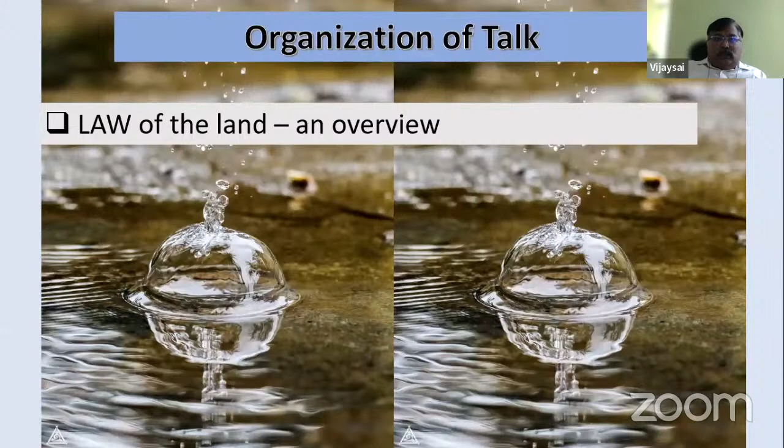So coming to the topic, the way I have organized this presentation, I call it the law of the land, just an overview. And why it is law, we will come to that very soon. Then we have a very interesting situation today, what we call the game of progress versus protect, with science being the driver there. So how do we look at that aspect when it comes to water as the domain, and water being part of the environment?

Technologies for water treatment and the role of chemical engineers, that will be the next topic. I would like to talk about a product that L&T Water has come out with, which is AGBR, and how one went about improving, developing, and then demonstrating application of this product, so that it benefits everyone here. Finally, we will conclude the talk, and this is the way it has been organized.

Interestingly, I call it the science of sacred 7. It's a coincidence that science is also a 7-letter word. However, the sacred part is something associated with our mythology. Way back, 5,000 years or even more, we knew that light is made of 7 colors. We call it Saptashwa or Ratha Saptami. And we talk about the 7 chakras or the 7 spiritual centers in the body, which are associated with the ductless glands. Likewise, we also talk about the 7 worlds or lokas associated with the 7 oceans.

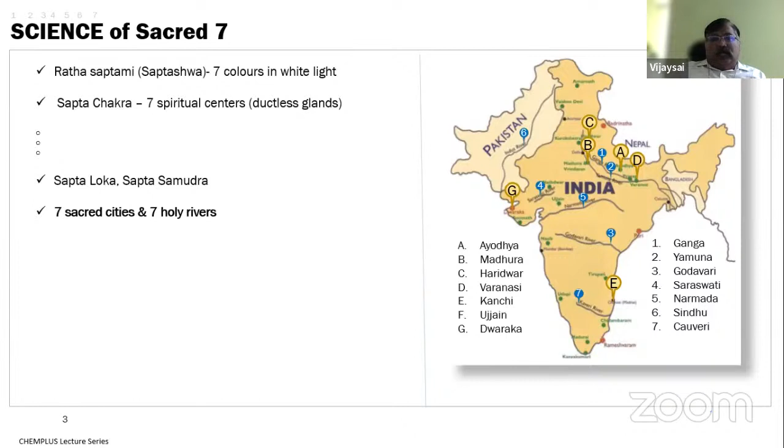Likewise, we have marked the 7 rivers too. So Ganga, Yamuna, Godavari, Saraswati, Narmada, Sindhu, Cauveri. These were the 7 holy rivers that we perceived in our literature way back 5,000 years and even a few thousand years too. So coming to that, what is the significance of that in today's context? How do we think we have transformed all this land, water, air in today's context?

In fact, the yogic literature as well talks about the 49 types of vayu or air in our body, which is also a derivative of 7. But in today's context, the 7 topmost polluted cities in the world are in India. And that is quite contradictory to the significance we had assigned to a few places in the past. 70% of our water bodies today have been declared polluted, and the 6 rivers are in a worrisome state now, and one of course is being reborn, which we call Saraswati.

Now, land degradation has become a major issue, and we should realize that 70% of the land is left now from being degraded, which we have to pay attention to now. So there are quite a lot of things happening to land, air, and water. And that is what I want to call the law of our country, which is quite significantly damaged. So when we say that these are all damaged, we try to look at the factor. Is it the population? Is it the education? Is it the poverty? What is it that has actually led to this degradation?

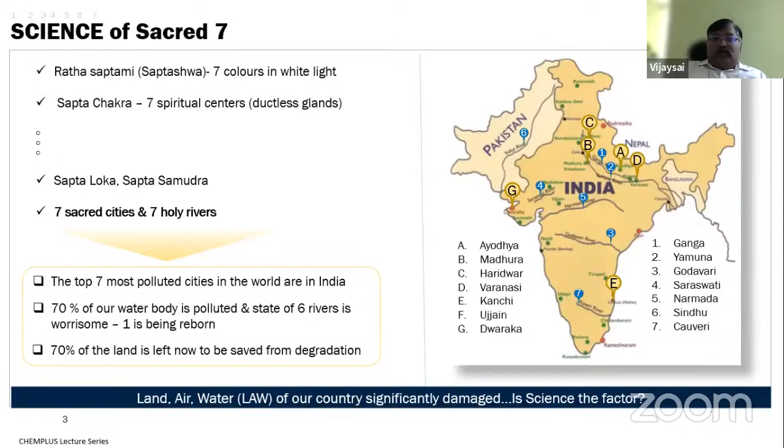And some people, in fact, ascribe it to science as well. So maybe science is one of the factors which has contributed to all these things. Is that the way to look into that? I mean, if science is responsible, let's look at what science has done to our life, and let's not belittle the importance of science in our life today. We have seen virtual presence, which has made distance almost meaningless today in terms of connectivity. We have amazing tall structures. They are tall to the extent that they are ladders to the cloud and even beyond, a structural engineering marvel never even dreamt of a century back.

Circumnavigating the Earth might today take a little longer than reaching the once mysterious Mars. And that's the space mission we have achieved. There is a situation today where, in fact, pets have started envying robots. Very soon, they will start getting confused: who is my owner? So robotics has been taken to a different level. Let's think about automation now, where the steering of the car is questioning the role of a driver. Sit tight and sit idle, let me do the job, is what the steering is telling the driver.

So life is filled with so much excitement. It's enjoyable, and it has made our whole Earth smaller than it used to be. So this is all due to the way engineers have crafted this, and there is a rich excitement in everyone's life today, and that's exactly what science and technology has brought to our life, thanks to the role of engineers here. And as we look into the near future, it's even more exciting.

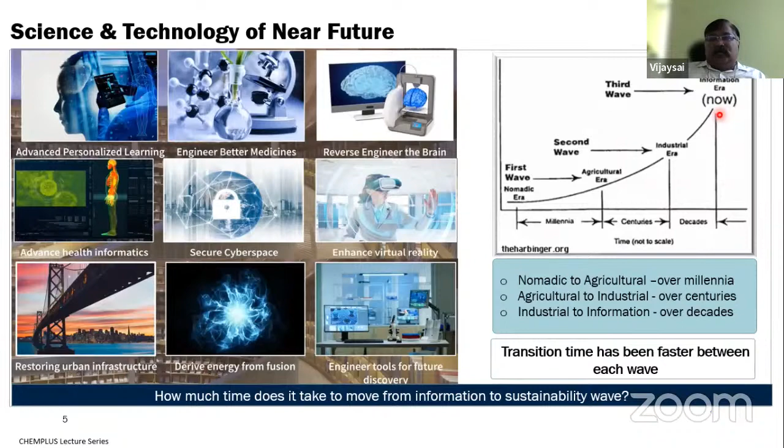So that's where things become in fact more concerning now, because when we look into the land, these are the quick statistics which we can immediately pull out from our internet. The solid waste is reaching an alarming level. The health hazard associated with solid waste is growing day by day. Leachate has become a problem, and every year we have been dumping enormous amounts of solid into the ocean.

When we talk about air, in fact, it is affecting our GDP in some sense, and our productivity is getting affected, and also the agricultural yield is going down. In terms of pollution impact, we are seeing that 7% of our healthcare funding is getting lost because of air pollution. And India, in fact, tops the list, where around 1.8 million people die every year because of air-related issues. Most importantly, in today's context, what we are seeing in water, the data is no different.

There are innumerable waterborne diseases that we are getting to see because of the polluted water bodies. As I said, 70% of our water bodies are polluted in the country, and 50% of the rivers are already polluted. So we now have to understand the context here. On one end, science and technology has helped us progress and make this world so beautiful. On the other hand, the same science and technology has led to all these miseries.

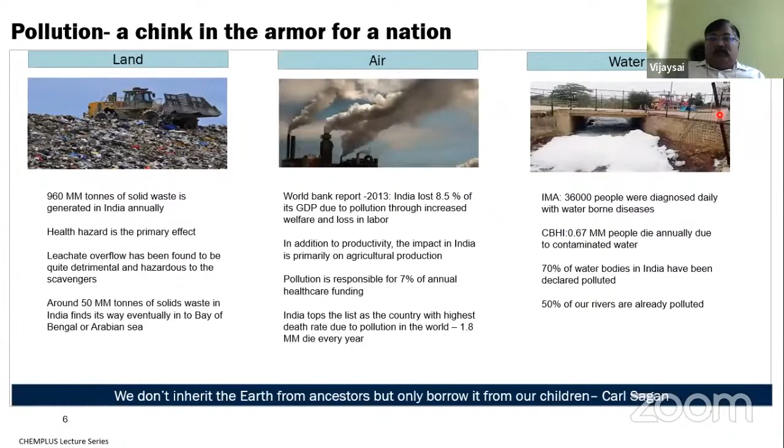Moving on to the particular topic of water now. Land, air, and other things we can talk about later, but the focus today is going to be water, and how we are going to manage all the challenges associated with water. So when we talk about that, it's important to understand what constitutes water, what do we mean by impurities, what is the cleaning associated with that, and particularly, what is the role of the chemical engineer?

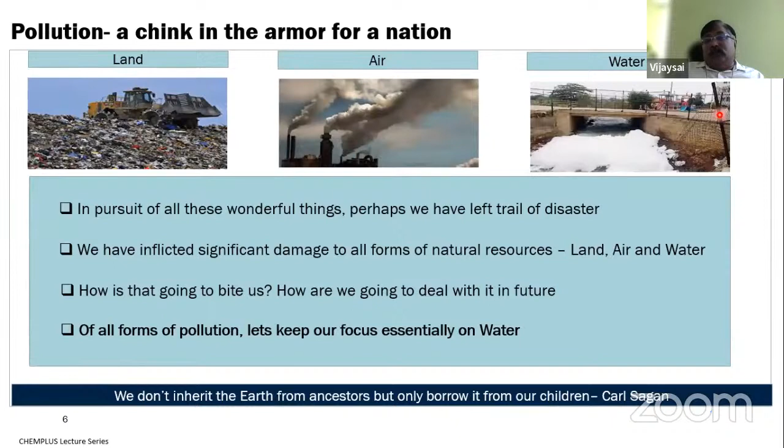So I would say that, in terms of water, these are the basic ingredients that you can consider to be the water. If we understand these three parameters, particularly the organics, solids, and nutrients in the water, and the interplay between them, I think we have understood water completely. But the fact is that the interplay is so complex and so tightly linked that sometimes it becomes almost impossible to decouple them and understand the water in totality.

However, when we talk about organics, it is parameters like COD, BOD, TOC, which are as fundamental as current and voltage for electrical engineers. Whenever you talk to people in the water domain, these are the parameters, the COD and BOD particularly, they talk about very often, and try to link with the quality of the water they are trying to treat. Likewise, when we talk about solids, we all know that TDS refers to the dissolved solids, suspended solids is TSS, and volatile suspended solids is another part of the solids.

And when it comes to nutrients, which also have to be removed from the water for it to be considered clean, we have total nitrogen, nitrates, and total phosphates, and these are the impurities here. Of course, there are physical properties like pH, temperature, turbidity, color, odor, and all these things are the physical properties.

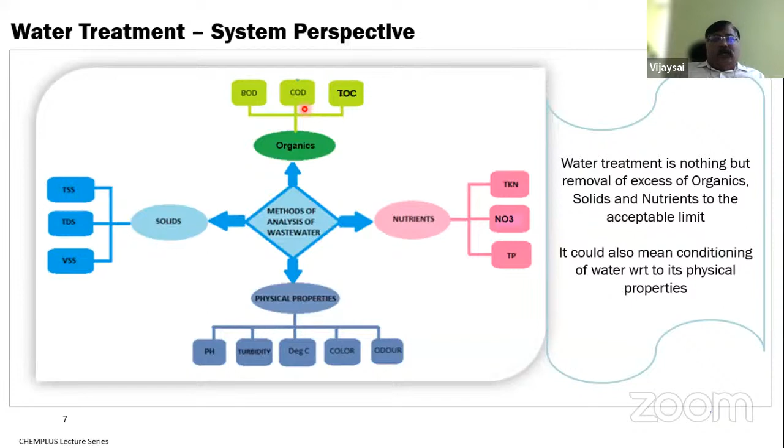So, when we think about treating water, the importance of all these parameters should be known, and then we can finally say how this water can be treated and what technology is to be used for treating this water. So typically, when we look into water as a business, we look into three segments in particular. We talk about drinking water, sewage water, and industrial discharge, what we call effluent treatment.

So sewage and effluent I broadly put under the wastewater category, and drinking water, of course, is something which comes from various sources, is subjected to some level of treatment, and is made available for users to drink. Of course, there are packaged drinking waters, there is natural mineral drinking water, and then the water we get from our tap, which is supplied by the municipalities or the corporation.

So today, all water is not considered to be safe, because even when you think about drinking water, there are so many impurities present at dissolved and suspended levels in water. It could be arsenic, it could be lead, it could be fluoride, it could even be uranium. Just Google uranium levels in Indian water. You can see almost the whole country is painted in red today.

And the World Health Organization recommends 30 ppb as the safe level of uranium in water. But in the majority of the states, out of the 1,477 samples that have been tested, the uranium level has gone way above the prescribed limits. That is due to various reasons, of course, which we can look at a later point.

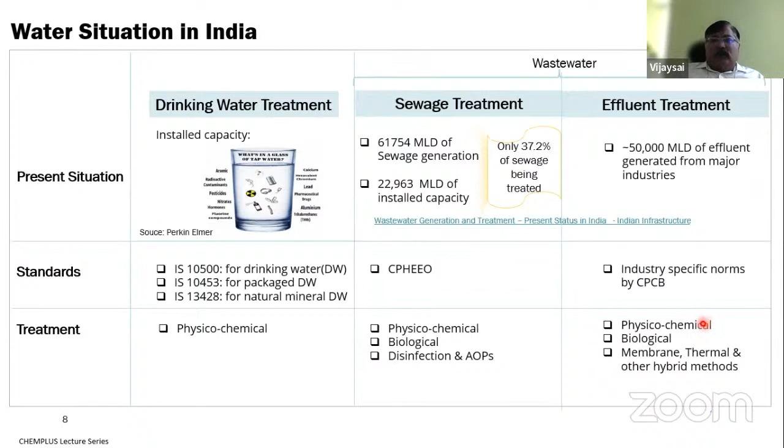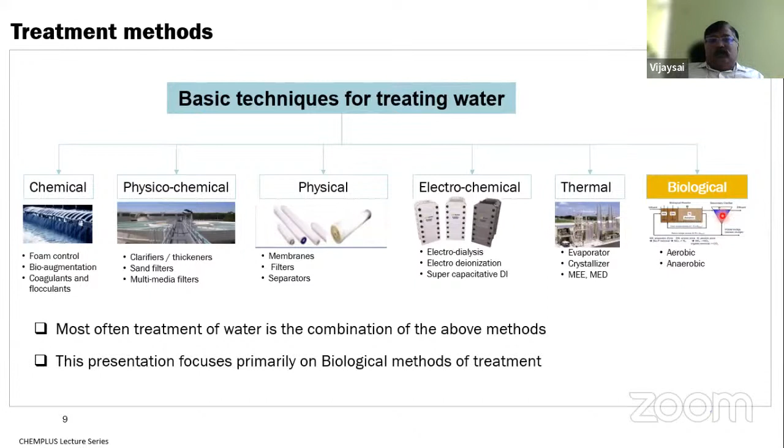which are electrochemical based. And likewise, thermal is a technique where we just boil the water, even under vacuum or atmospheric conditions, so that we get the cleaner water as vapor, and the muck gets left out. So that's the thermal solution. And today, that's why I have highlighted it in a different color, we are focusing more on the biological ways of treating water. Let's keep the focus today on biological treatment techniques and how they will help us, particularly to address the situation of municipal wastewater.

Before we get further into the topic, I just wanted to take a small pause and understand if there are any questions, or we can move forward.

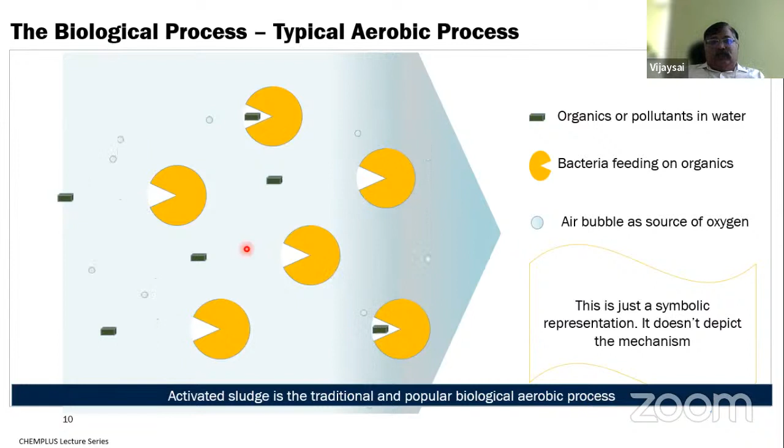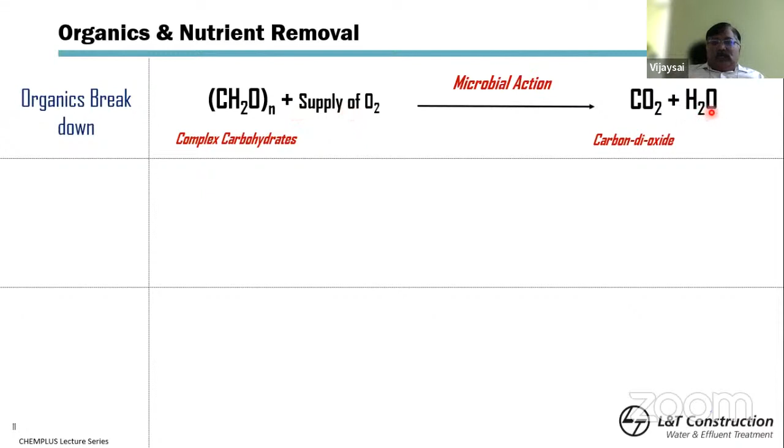So what are we trying to remove in terms of wastewater? We have the carbon as the main source of food for the bacteria. So we are supplying oxygen through the air. Basically, the carbon and oxygen react to form carbon dioxide and water in the presence of microbial action. So that's what we call treatment here.

Likewise, there are nutrients in water. The nutrient could be ammonia or phosphate, and the ammonia basically gets converted into nitrite, nitrate, and finally nitrogen. And that is also a biological process. In the presence of bacteria, this whole process takes place. So this is all very fundamental to the water treatment here.

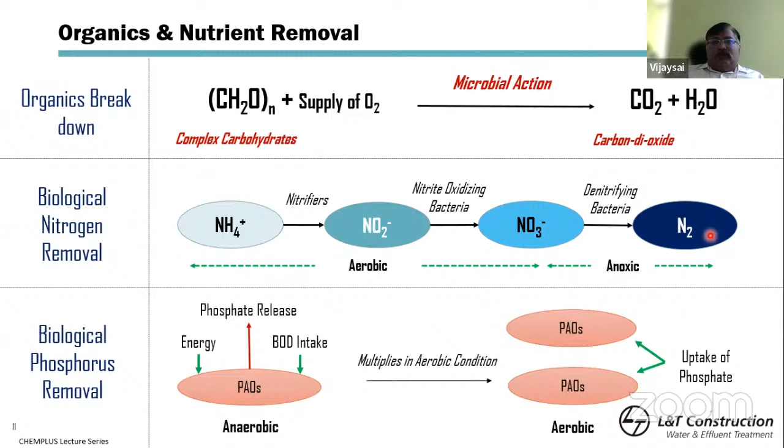We will be touching upon many terminologies here. For instance, there will be biological oxygen demand and chemical oxygen demand. So in a sense, we know that wastewater comprises organics, which we consider part of the waste. Now the organics are nothing but carbon compounds. Now the carbon has to be converted to CO2 in the presence of microorganisms.

So if we are talking about the amount of oxygen required to chemically convert this carbon source into CO2, that is, what is the mass of oxygen required per liter of this particular waste, we call it chemical oxygen demand. That is the COD, which is most fundamental. That is nothing but the mass of oxygen required to act on the organics in the water and then convert it into CO2.

Likewise, we talk about the biological oxygen demand. So basically, how much oxygen is required for the biology or the microorganisms present in the water to convert this waste, the organics, into CO2. That is the biological oxygen demand. Because as you can see, what is chemically convertible need not be amenable to bacterial action. So that is where the BOD mostly will be less than the COD in the wastewater context.

So those are the important terms which we can probably remember. Suspended growth systems are the ones where the microorganisms that I showed in the previous animation are suspended in water, so they are free to move and free to chew up this particular impurity that is coming in. Attached growth systems are the ones where these microorganisms are basically glued or attached to a particular surface, and the impurities reach them and get subjected to further degradation. So that is what is the attached growth process.

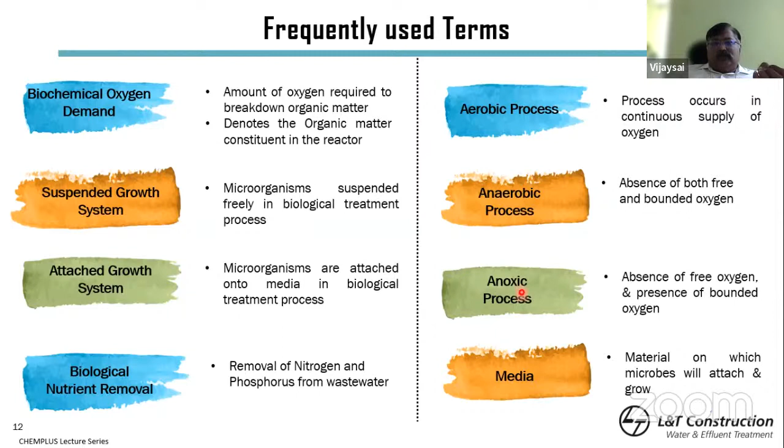Anoxic process is something where a very small amount of oxygen will be present in the system, and unlike aerobic and anaerobic, where anoxic is in the absence of or the very small presence of oxygen, this whole reaction would take place.

So the one technology that was extensively used until now, started around 1914, is called the activated sludge process. What essentially happened in the case of activated sludge process is a very interesting concept.

So you have an anoxic section to begin with, for the removal of nutrients, and an aerobic section. In the aerobic section, we blow air and the bacteria grow in the tank, using a suspended growth mechanism. The bacteria eat the incoming organics or food, and finally the organics get converted into CO2 and water.

Whatever bacteria you are able to separate out from the water is taken to the clarifier. The clarifier is nothing but a settler - a huge tank designed to allow the bacteria to settle down. They settle, and then you remove the excess bacteria as sludge, sending the remaining bacteria back to the anoxic tank.

In the aerobic tank, the ammonia in the water is getting converted into nitrate in the presence of oxygen. The same nitrate gets converted in the anoxic section because it's a reducing environment, while the aerobic section is an oxidizing environment. So nitrate gets converted into nitrogen, ammonia gets converted into nitrate in the aerobic section, and carbon gets converted to CO2 in the aerobic section. This is all what happens for wastewater treatment in the aerobic environment.

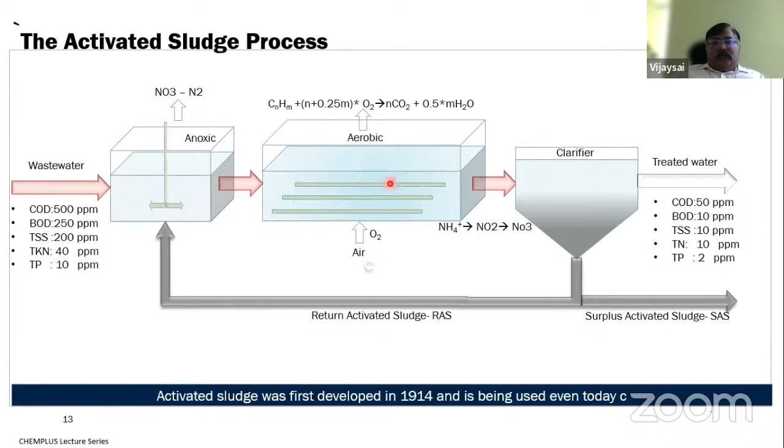Now, advancements started happening later in the 1970s and 80s, and people started further improving what you call process intensification - could we achieve the same or better output by reducing the footprint, by making changes to the process, squeezing it to give more output? That's the effort which started.

With the availability of better membranes, the membrane bioreactor started becoming more popular. Why do we need to construct a very huge clarifier? Because all the suspended microorganisms, once they slip from the aerobic section to the clarifier zone, have to settle due to gravity. That requires a large amount of time and volume for the bacteria to settle down, and only the clean water can overflow as the treated effluent.

Whatever bacteria get collected are sent back, but is this an absolute barrier for the bacteria to be retained? The answer is no. The absolute barrier was the membrane bioreactor - you introduce an ultrafiltration membrane instead of a clarifier. That's the only change. This ultrafiltration has a very fine pore size, which becomes an absolute barrier for the bacteria to slip through, and it only allows the clean water to go out.

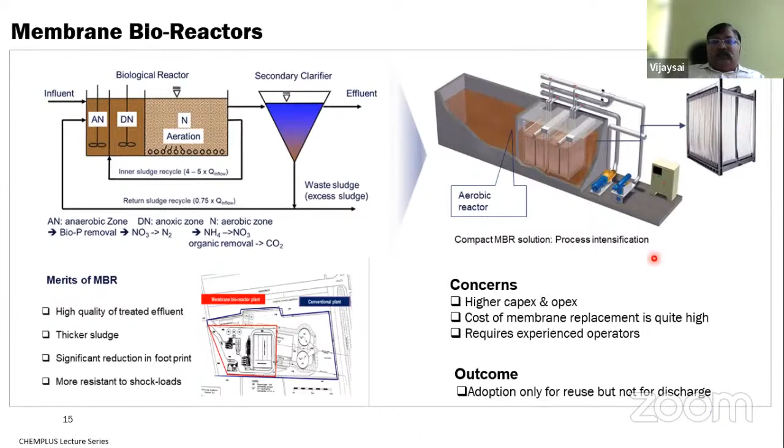So finally, the adoption only for reuse but not for discharge is a good one, because the quality of water that comes out is quite clean. But at the same time, we have to be mindful about the opex and capex part in case of MBR. So the next change that happened is what you call the MBBR.

And in the MBBR context, we introduced some kind of packing material into the system.

So these packing materials act as a surface for the bacteria to come and sit on, and then remain suspended within the wastewater environment, so that they can chew up the incoming organics with the growth of the biofilm happening on the surface of these packings. So that is the next change which MBBR brought in, and definitely MBBR was a successful technique in the majority of cases.

There was a modification to MBBR later on, which we called the integrated fixed film activated sludge, where instead of letting the sludge go out after clarification, you use the same activated sludge concept, bringing back some amount of sludge from the clarifier and using it in a recycle mode. This is called the integrated fixed film activated sludge process.

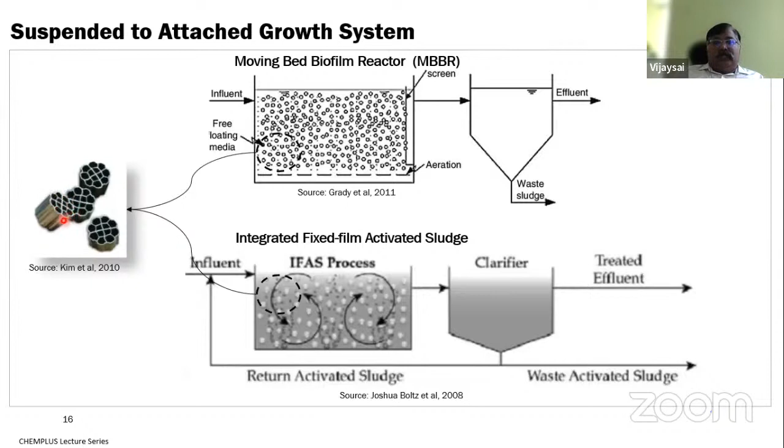The big change to notice here is the attached growth mechanism leveraged with the help of the packings, because bacteria mobility in suspended growth is quite intense, but there are other drawbacks too. The bigger advantage of attached growth over suspended growth is that there won't be much loss of bacteria with the effluent leaving the tank. They remain attached to the surface, and with that surface they are able to treat the wastewater effectively.

Now, with all these developments, I wanted to touch on the last reactor here, because all these things are necessary to understand the next topic, called the sequencing batch reactor. This is a beautiful concept introduced of late, and particularly the most widely used concept in our country, in India. Why? Because we exploited a lot of other benefits in wastewater treatment through this technology.

So what it essentially does is it's a batch process. It allows the sewage to come and fill into a tank - just one tank instead of having separate tanks for membrane, aerobic, anoxic and other things. So it fills in the tank, and it reacts in the tank in the presence of air.

After we blow air for some time, we shut down the airflow. Now naturally it becomes an anoxic and anaerobic environment. In that anaerobic or anoxic environment, you allow the sludge to settle down, which gives enough time for the denitrification to happen. Then you decant the clean water, and take the whole process back into the cycle, and again start filling with sewage.

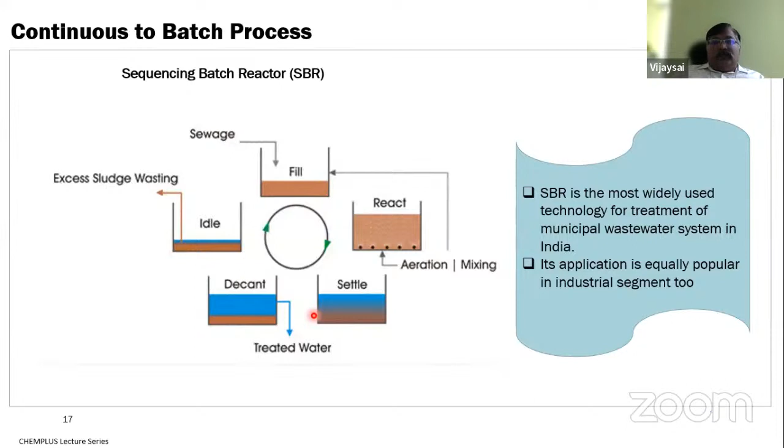So how do we basically move to the requirement that our country particularly has? There's the solution we came up with in L&T, which I am going to quickly touch upon, and see how this whole effort was carried through, and how this whole exercise essentially gave us a product that is quite differentiated today in the market, and in the context of what the country needs. So that is what is basically called the AGBR technology, that is attached growth bioreactor technology.

And if you see the sewage water treatment process that we essentially were talking about all along, this is a floating material or grit removal mechanism that we have in the beginning.

Then we have a primary solid removal for the sewage water that comes in. Now the heart of the system is basically a secondary process, which I talked earlier as the aerobic activated sludge process. And then we have the water going into the sand filter. Finally, it's coming with the tertiary treatment as a treated water.

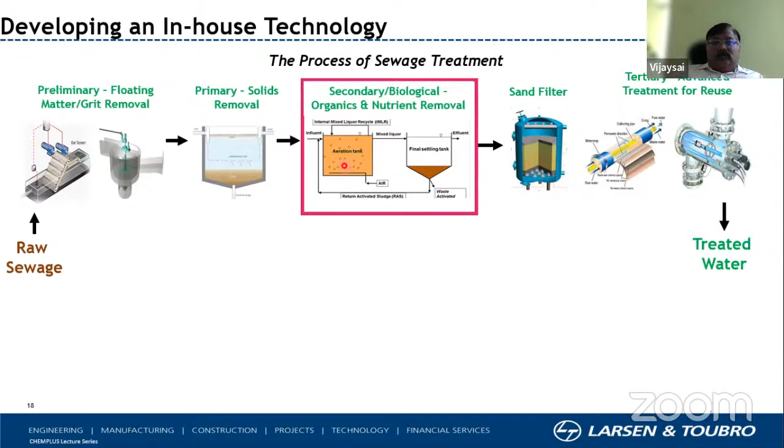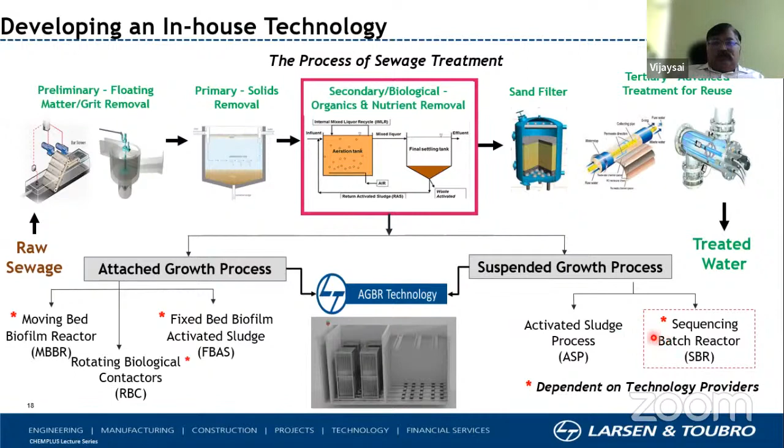So now the heart of the system, which is basically the secondary biological treatment system, we introduced what we call as the AGBR, which is in fact the blend of attached growth and the suspended growth technology. So this is what we call the hybrid technology. What it essentially does is that it took the moving bed bioreactor concept, or the fixed film bioreactor concept, and then it integrated it with the concept of the sequencing batch reactor and the activated sludge process. So this is a hybrid system.

Now how does it work? There is a lot of work that happened in the lab, and a systematic development process was undertaken. When we looked into the lab scale studies, we spent quite a lot of time understanding the design and fabrication required to select various media relevant from the attached growth perspective. Because in the MBBR case, we have seen those granules, how they provide the surface for attachment of the bacteria. Likewise, what are the other media that we can think of for growing this bacteria on the surface and creating this attached film on the surface of the media?

So a lot of media were tested, and the best media selection happened through the lab studies, and the chosen media was tried in the pilot scale, and then we recommended the best media to go for this particular technology. And the patent and the field implementation was conducted later.

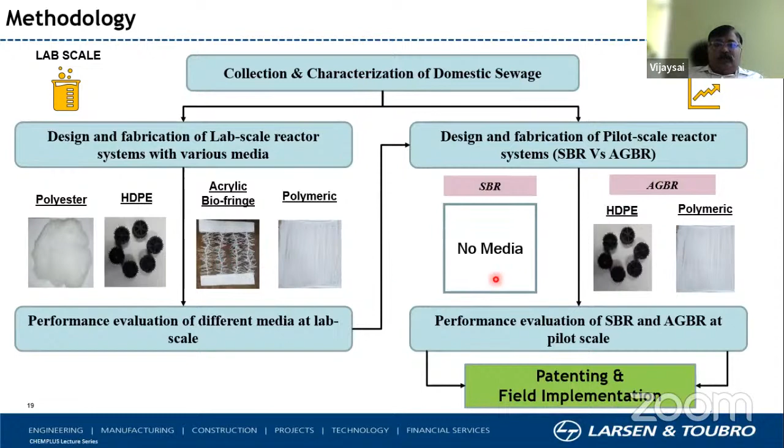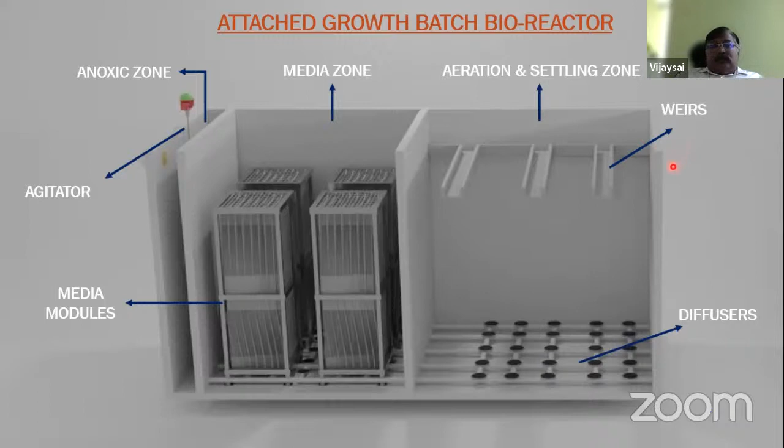So one of the advantages that we clearly see here is that in the SBR technology, we need what you call decanters, which are an integral part of the whole system. So we have used the principle of gravity and natural displacement to remove the whole concept of decanters, and that's where the weirs that are provided here will allow the clean water to come out with just a displacement mechanism, which also reduced quite a lot of cost from the whole system.

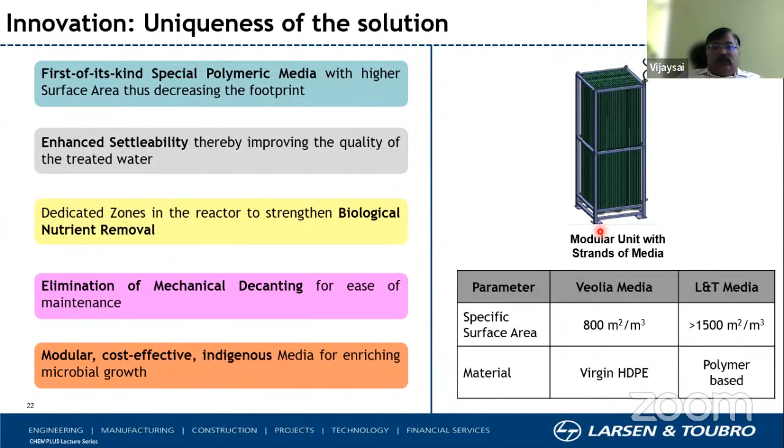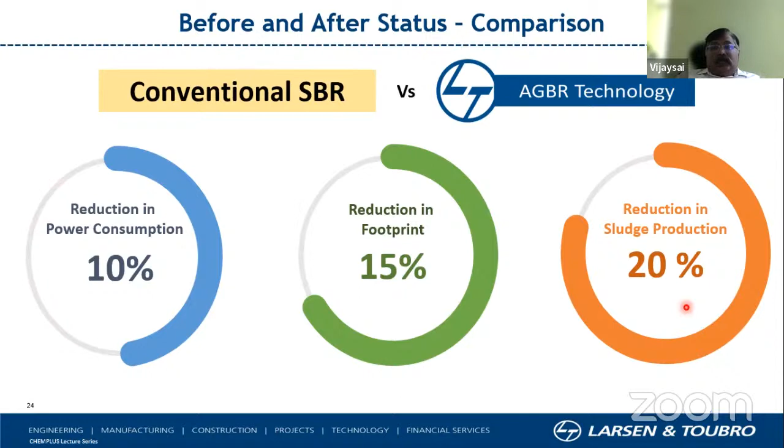So there are multiple advantages which we can see with the AGBR technology that got introduced with the systematic development of both attached and suspended growth processes. Essentially, it benefited us in terms of reducing the power consumption against the conventional SBR process by 10%, the footprint reduction we could achieve was 15%, and the sludge reduction was close to 20%. Which is exactly what this country needs today, and that's where the technology is now ready to deliver.

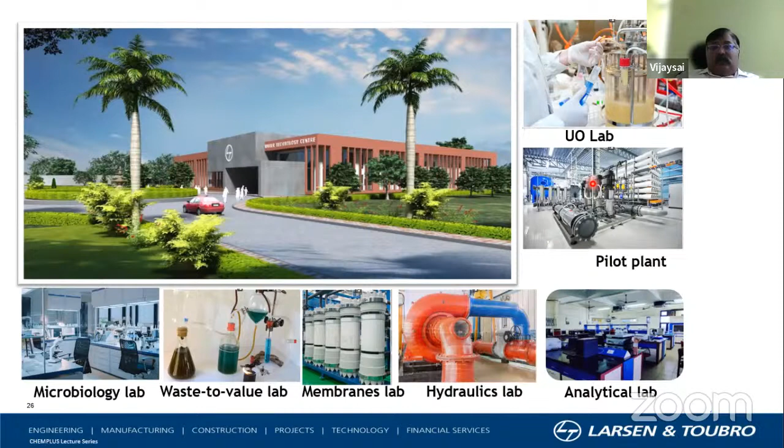We have identified a series of technologies that we need to bring into the water space in India particularly, and that's where I wanted to conclude my talk. So as we started this whole discussion, the role of the chemical engineer is not just to progress today. Progress has happened, progress will continue to happen. Preserve is also another part, protect is also another part, which we have got to start thinking about.

Whether you talk about land, air, or water, the focus now has to be deeper, and the impact has to come out in terms of protecting and undoing the damage that has already happened to all three resources. And particularly in water, the opportunity is quite immense. The water domain has multiple challenges,

because getting the sensors to give appropriate readings, be it BOD, COD, the micropollutants, or the metals, is all very difficult. And when we want to understand the total quality of the water, the cost of testing is quite immense. So chemical engineers have an immense role to play in developing new sensors, be it inferential, secondary, whatever you want to call it. If you can come up with reliable sensors to understand the quality of the water at very small trace impurity levels, that's a big change we can bring to society.

Finally, a safer, cleaner, and enjoyable future is ahead of us, and that has to be crafted by chemical engineers. And with that, I wanted to conclude my talk, and I will be happy to take any questions after this.